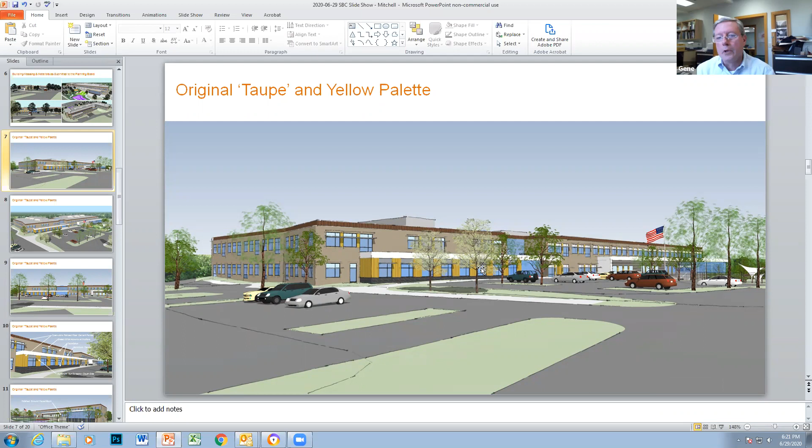With this taupe colored brick, the thought is these are young kids, so it's a soft color. When you look at the red building, you'll see this kind of recedes from sight, while the red building comes forward a little more visually. We can make either one work, but I'm just trying to give you guys some data points.

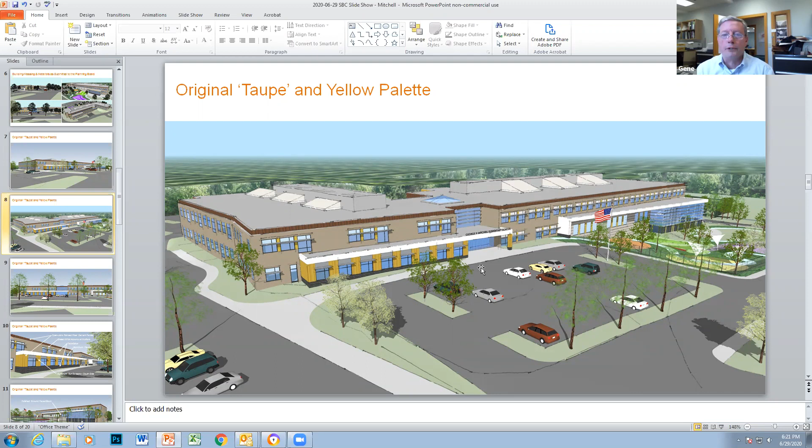So if this is the front of the building, again, it's a masonry building. We're looking at some sort of masonry base. These are all the windows along the administrative suite. One of the themes going on inside the building is this idea of growth and thriving.

We're expressing it inside the building with vertical trim that runs up through some of those floor openings. What we've been looking at is a painted panel that can be ripped or manufactured in various widths and can have different factory paints on them. So though it doesn't have a wood grain, it still has a mottled organic look to it, and the same thing up at the cornice.

The other things are these white roof structures, and whether this returns to the building or comes down to the earth like the one over here. This is an aluminum panel system, which again is very durable and shouldn't be a maintenance problem.

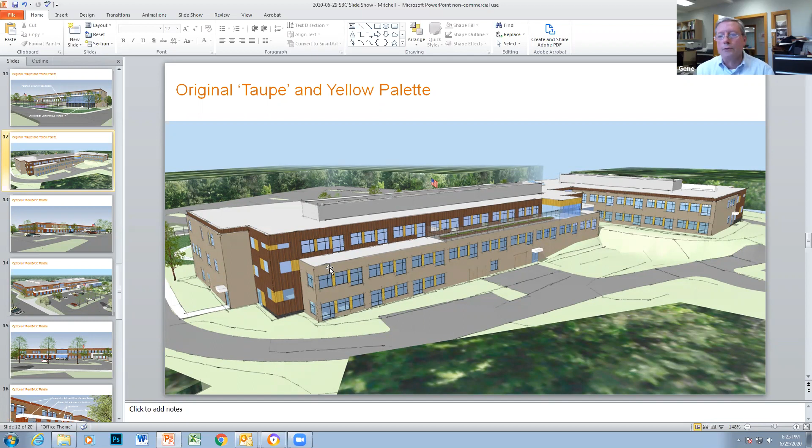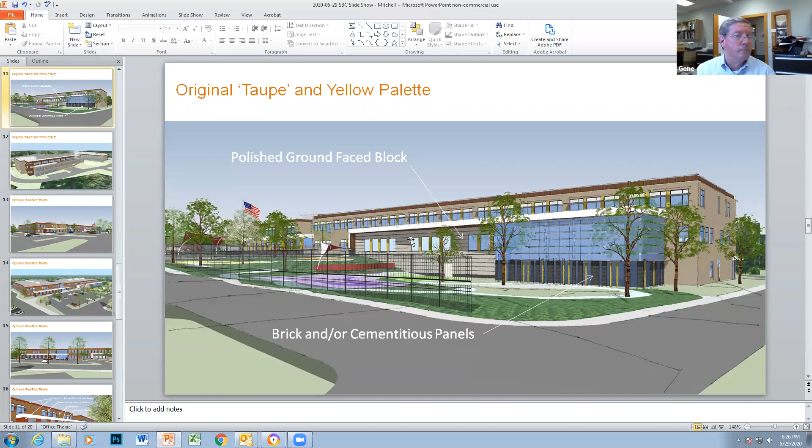So that was the taupe scheme that we've always had. And if you want, I can just go through another option, and then we could open it up to comments.

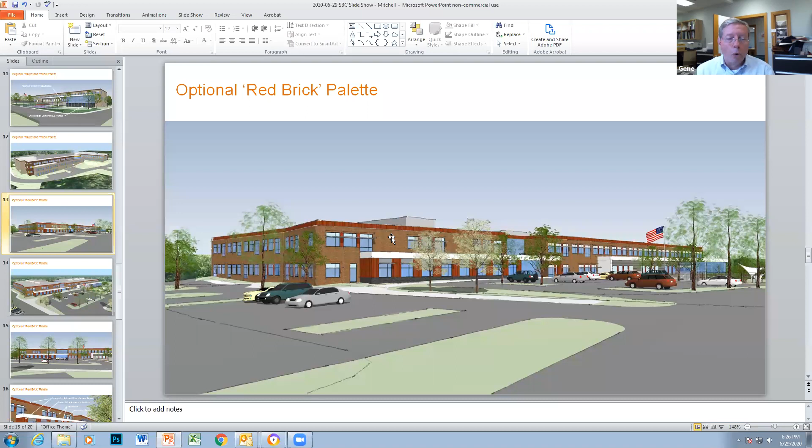So we did take a look at a red brick option. It's a lot of the same materials, just different colors. When we go to the planning board, I don't want to be asking for permission for specific colors—we just want to talk about the shape of the building and the materials. But this is simply a red brick as opposed to a taupe brick, with the same kind of vertical mottled elements out of cementitious boards, and the same aluminum.

And when you look at the front of the school, if you said to us it's really got to be red—whether this is all the right tone or not, I don't know—but we can work with the colors if we use a painted panel as opposed to a pre-finished panel.

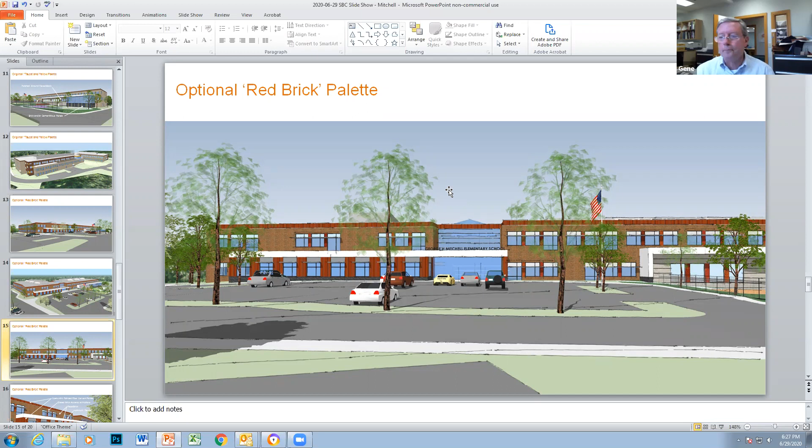We're showing you the same views, and it's all the same stuff with the sunscreens and the same products, just again in these different colors.

What happens down here is what we're working with now. We're working with the design committee. We've been looking a lot at the interiors, but we need to fold in the exteriors with them also, and that's what we're doing at this point in the project.

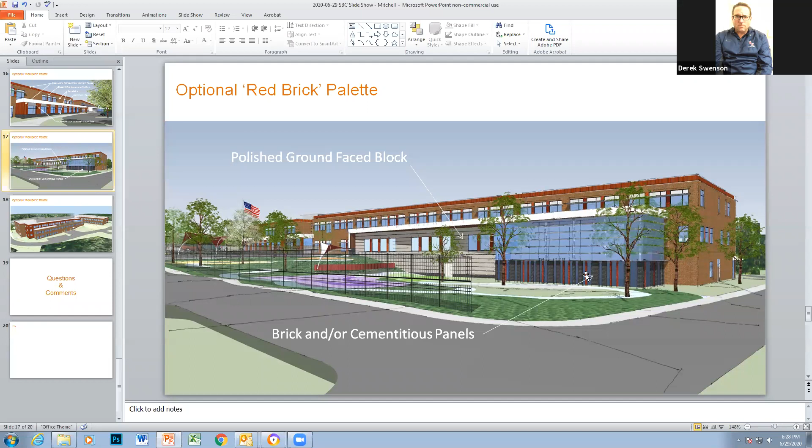So again, breaking down the masses—it's always the same theme, just different colors.

So again, I keep repeating myself, but one of the things we have to do is show the planning board the massing and what the building might look like. We don't expect them to approve colors, but we wanted to run it by you all before we put it up on the screen for them on Wednesday night.

That's really what I wanted to get on the table tonight, John. And if anyone has any thoughts or comments, we'd definitely like to hear them.

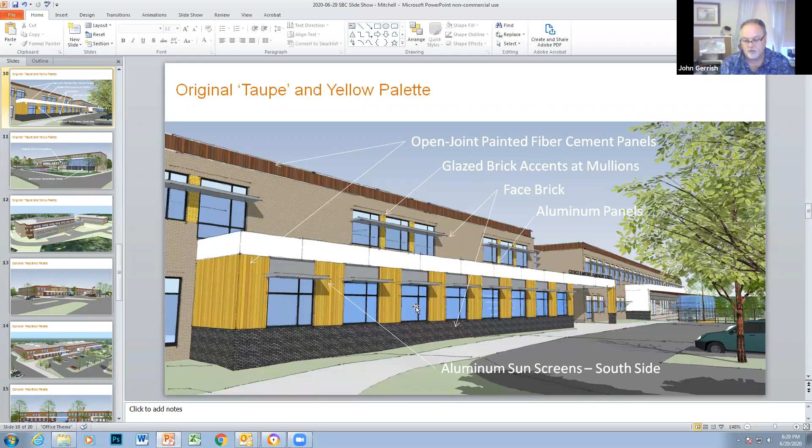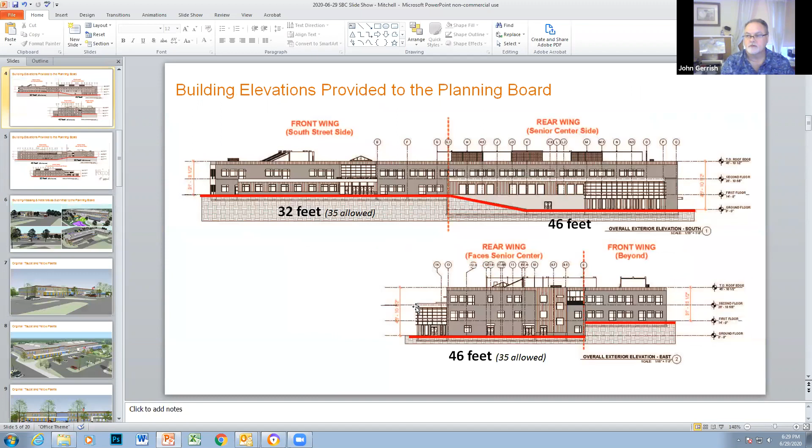Yeah, I don't have any. Does anybody have any comments or thoughts for the planning board? Going once. So given that, that's great.

So our suggestion would be that we work with that design subcommittee on the interiors and exteriors, and at some point come back to your committee, the full committee, with a recommendation.

And I think, Jeff, beyond those design subcommittee meetings that are ongoing, you have 2 or 3 technical subcommittee meetings. Is that correct, Jeff? Yeah, we have what I'd like to do, 2 meetings in the month of July, one being on the 15th, and then seeing where we're at and maybe adding another one. But what they are, and they sort of overlap...

A wrap up of the security working group with the fire and police, showing them the input that we had from early on in the meetings, and actually presenting it to them. We wanted to review areas of first response and the labeling of that as an example.

We'd also go through the security, such as what Shane talked about, the types of glass that are around the building, such as the school guard and the approach that was there. We'd also talk about the hardware and the door controls, and basically how the parents enter versus a visitor entering, that whole process, reviewing that one more time.

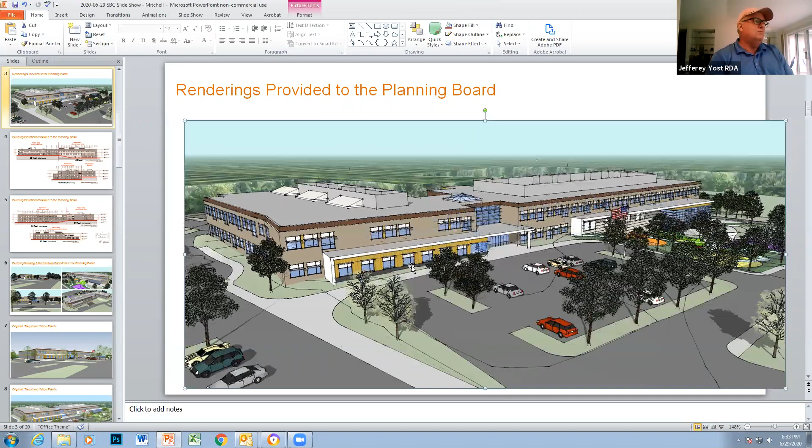We also got into the weeds again a little bit with toilet accessories and process. So those are the type of technical meetings that we've had. I can go into more detail, but I think that's where we are at this time. As we have the meetings, we'll go into more detail. I think that's it.

Derek, do you have your hand up? Yes I do. In that conversation we had about toilet paper dispensers, I learned more about toilet paper dispensers in that 3-hour meeting than I ever wanted to know about. Sort of like roof drains? Yeah, sorry. I really tried, John. I really did. You knew I was waiting for that opening.

Jeff, when we initially met with the chiefs and deputy chiefs, we talked about the exterior doors being labeled. Yes, and we actually have them labeled. There's a process where they're labeled counterclockwise, and all the doors are labeled for first responders. We have that done, and that'll be part of our meeting with the fire department and the police department.

Because if I remember correctly, there was a little discrepancy—one party had concerns that it was a lettering system, the other a numbering system. What are we using on the exterior? We actually use a hybrid of both. It's an A, B, C, D system, basically for the 4 sides of the building. The front would be, I believe, A—I always go backwards, but I think B or D are left or right, and C's in the back. Then however many exits or entrances there are, it would be like A1, A2, A3, A4.

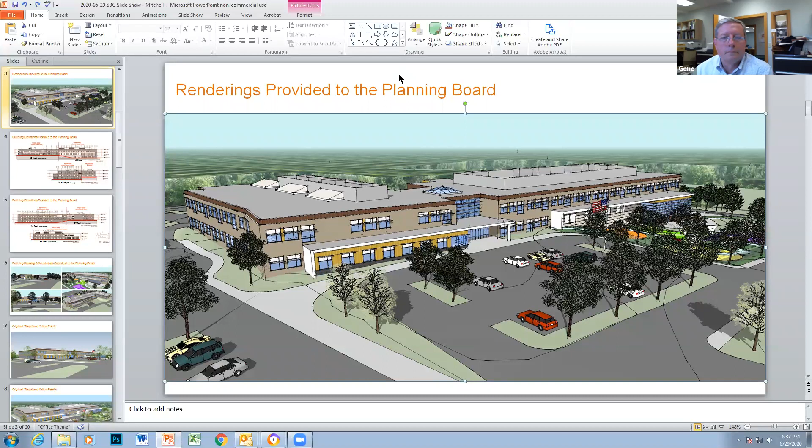But one of the things, Derek, that we will do is the numbers that we have in the rooms right now are construction numbers—that's all they are. Those won't be the final numbers. We'll actually sit down with you during the construction process and number all the rooms with what they actually want to be called, and that'll be on the sign of each door. Then that signage package gets tied into the fire alarm package for the addressable system, so if a smoke alarm or something goes off, they know exactly where it went off.

Great, all right, let me keep going. I just want to make sure you knew that. I think that's kind of the activities we've been up to and are projecting for the next couple of weeks.

Okay, any questions? Just one more thing, Jeff. When we're doing the numbering system for the rooms, it's going to be a numbering system. Some of our sub-separate programs are not going to be identified through signage, correct?

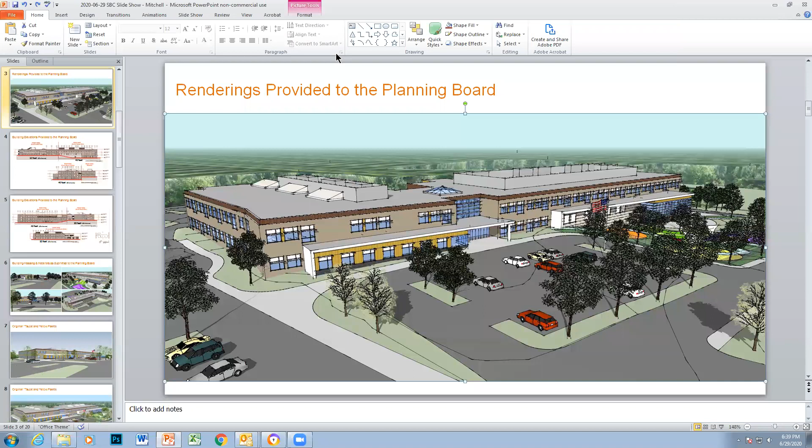Okay, but that's not, the way we approach it, Derek, is that we do it during the construction period. We don't do it during the design phase. But sometimes we go ahead and get it done now, and then it's ready, and when the contractor's on board, we submit it.

Okay, thank you. Any other comments or questions for the designer update? All right, thank you, John. I'm sorry. Yeah, go ahead, I had to find my unmute button. Gene, would you be able to send me a copy of your presentation so I have it for my records as well? Sure, absolutely. Thanks, you bet.

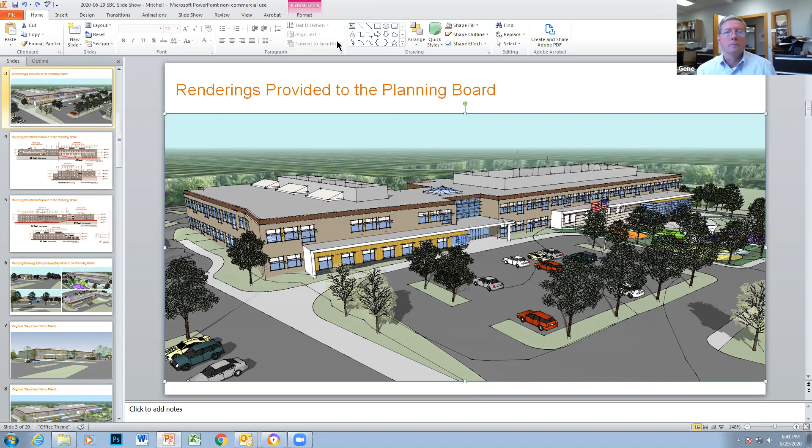All right, okay, I guess that's it. Thank you, Gene and Jeff. Item 6 is confirm pre-qualification subcommittee, which we addressed in item 4. If there's any more discussion on that, we can have it now. Otherwise, we can move on.

All right, item 7, report of the communication group. Thanks, Sean. A couple quick things - just a reminder, if you're watching this after the fact, we have a website, bridgewaterschoolproject.com, and an email address, bridgewaterschoolproject@gmail.com. For the committee, we need write-ups for the following folks for the website: Mark Lindy, Kathy, John, and Matt Rushton. If you go to the website and click on project, meet the project team, you'll get an idea of what we're looking for. So if you could send those along, that would be greatly appreciated so we can get the website updated with your information. And that's all we have, I think.